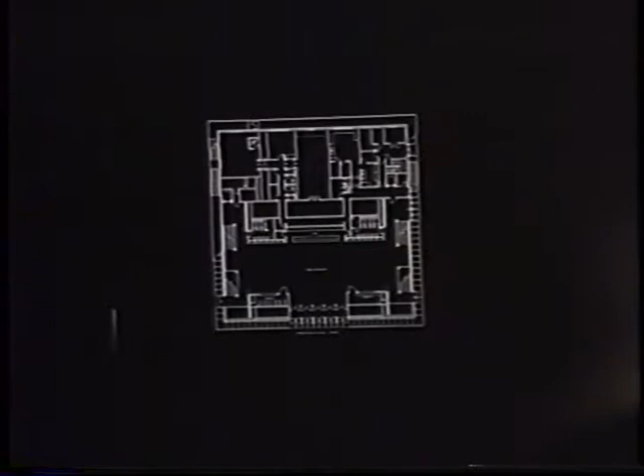The two stairs make you access the auditorium here. The stage of the auditorium is in connection with the parking. And the entrance of the building is also in connection with the parking, because the parking was not horizontal. So you have two connections, the parking, and when you open the door here, the magic box allows outside spectacle.

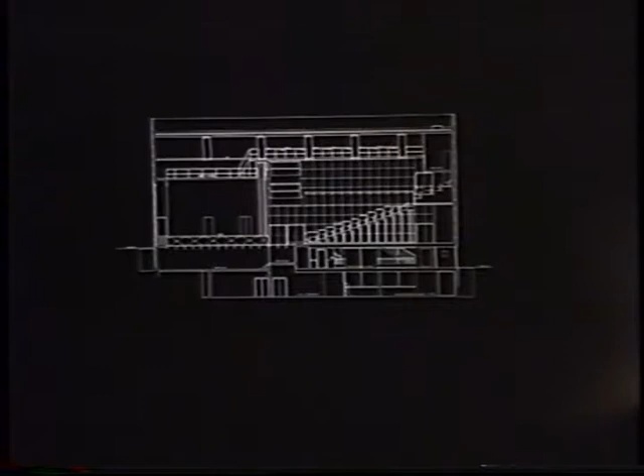Please make it clear. Focus. Okay.

Focus again. We are inside the auditorium. You should put some batteries in, it doesn't work anymore. Maybe the other one? Actually, no?

Here it's underground. To make the cultural center as literal as possible, we did one underground floor, which receives light from the peripheric.

Focus. So the light, please. Could you make the focus, please? It's okay.

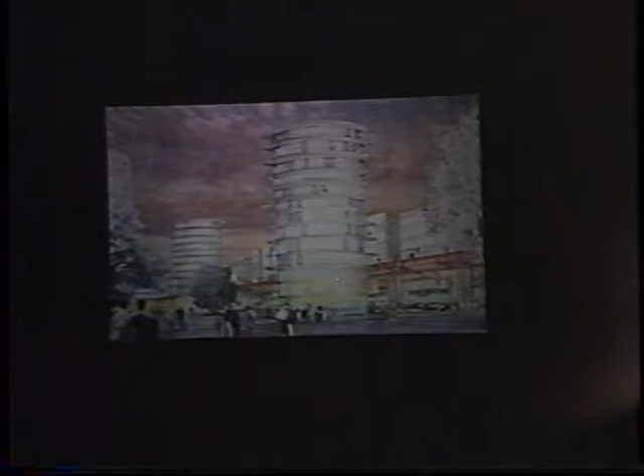All the building is located along the pontons, and we create, in fact, 2 levels: a pedestrian level, and another level on the ground, on the real ground, with cars and...

c'est toi qui as appuyé? Oui.

And the pontons, in fact, was the prolongation of the district network of the existing district network of the rest of the city in the south of it.

Different views of the site, and at the end of the pontons, on and above the water, we think it was possible to create different places to walk or to drink, or with shops and so on, to see the river, to see the city, to have, in fact, a relation with the city.

And with this ponton also, it was possible to have an in-depth reading of the project. It was not just like a front on the river.

They didn't like at all our project. We have lost. Yeah, we have lost, but superbly. Superbement, comme on dit. Superbly. They didn't like at all. They were waiting for a classical city, you know, like in the center of Paris.

Our land, if you can say land, because it's in fact a dalle, comment on dit dalle? Slab. A slab, yes. Was a very strange place here behind those ones. It was not in a front position on the pedestrian axis. So putting it up authorized us also to have a view on that pedestrian axis, which was, we thought, important.

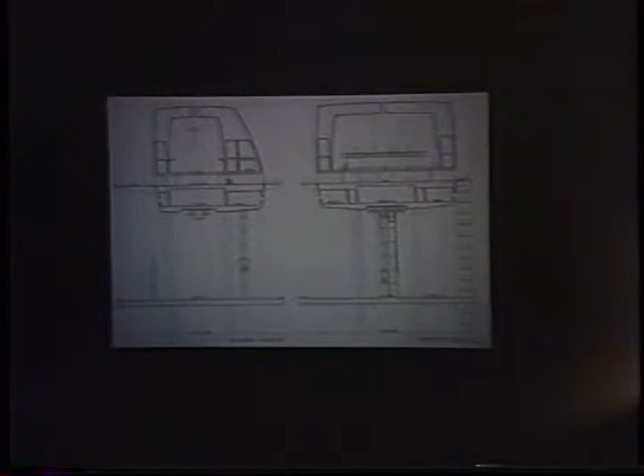Here we are up. Here is where the entrance is. Here is the parvis. And this parvis authorized us to have a different point of view of La Défense in every direction.

So that once more we have not a back and a front. We embraced all the landscape.

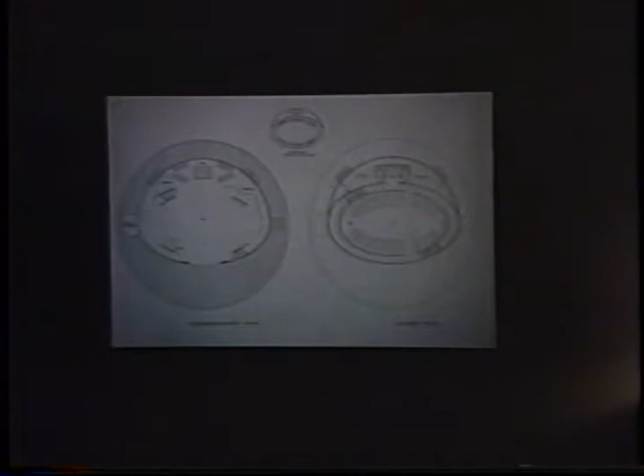We tried so the form of the church couldn't be too easily assimilated to a Christian church, because it is a Christian church, but they wanted to be able to accueillir, to invite everyone. So we wanted the form of our church to leave free interpretation to anyone and not be too easily recognizable.

And what we did, which I forgot to say maybe, is that we changed the normal way of doing a church in France. Normally in France you have a landscape, you have the church, you have the cross, the cross on the top of the building.

In our case, we put the cross down, on the ground floor, in a disc of water. You see it there. Here you have the bell, and the bell you can see it in the water.

When you are in the towers, the reflection was calculated very precisely - when you are at the 30th floor of the Fiat Tower, you can inverse the model. Normally it's like that, and the church - we did it with the towers, the church like, and the signs here, and we see that from the towers.

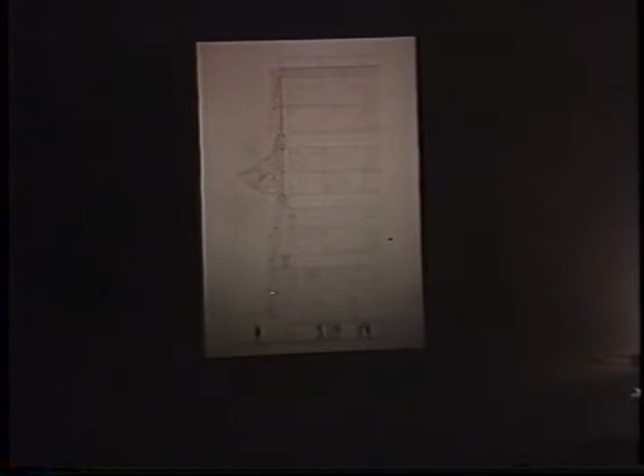We would build this building very quickly out of posts and girders of metal, very approximately, and then we would just dress it. There was a big—well, anyway. So this is complicated: we took the wind up, it went into a wind shaft in this thing here. Here you have springs, and another spring, so the dynamic of the wind would make the building move. Here you see the vanes, and here are little pockets, so the wind came from the outside into the pockets like a sail. This moved with a very slight wind, and even with an incoming wind, the thing would keep popping out—it was very strange.

The best thing about it is that the big problem of this kind of building, a universal exhibition building, is that nobody ever knows what to do with it afterward. This building destroyed itself.

It was like a parachute. If you keep a parachute on the sun, it will burn itself. So this building died, it burned itself, and the skeleton was left. So we can reuse a skeleton, or bury it if you want. So that is a story about this building.

Maybe there's another one. Oh, yes. At the upper level, there were these things that would open and follow the course of the sun. And everything is fabric, because everything will be built very quickly, very cheaply, and they would do that.

Now, you stop me if you're tired.

Why do I tell you this story? Because it's to fill a void, to fill a silence. I need to talk and to argue. I think modernity, our time, creates this void, and we are in a big void. The void is 95% of the buildings that are made now that is not architecture. They are culturally inexistent, this creates a big void. Most of the buildings that are culturally void are also technically inexistent.

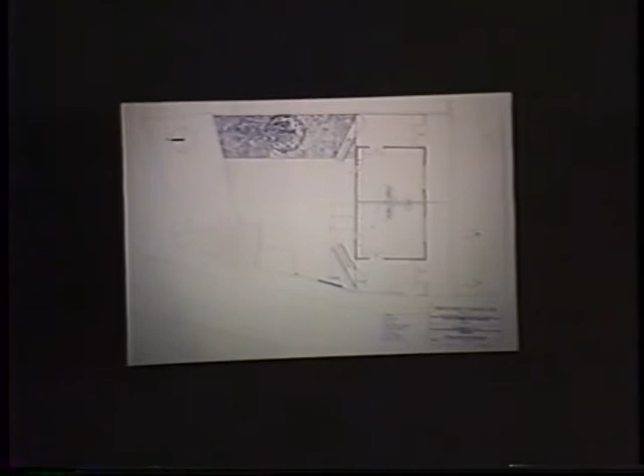This is a facade, made of corrugated metal, and at one point PVC -- you know what PVC is? Plastic, transparent. It becomes transparent and it's cut like this. This is getting built. That's another facade.

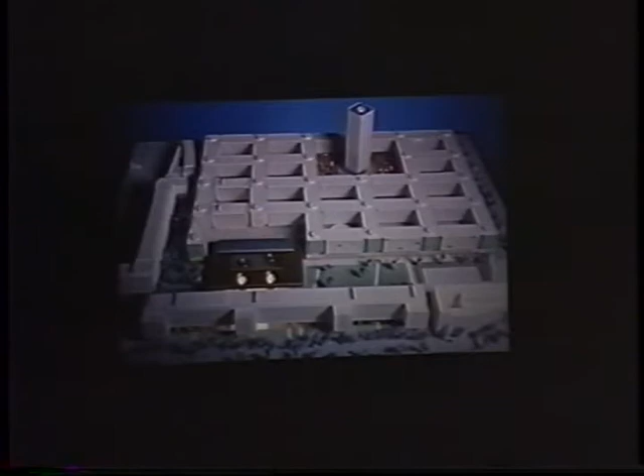Okay, something else? No? I don't know, maybe I go fast. This is Jussieu -- we'll have buildings after that.

Jussieu is a project that Édouard Albert built. It was a library, in a huge university where I think 40,000 students are supposed to study. In fact, it's a terrific place. It was raised, 5 meters higher than the street level of Paris. There are pilotis, and there's this grid on pilotis. The only big structure is for the administration. So conceptually, it's a nightmare.

But there's an idea that is quite interesting in it. For us, it's always a story -- the question of the ideal city, the cité idéale. An ideal city is always suspended, for intellectuals and scientists, raised above the level of the street, an abstract grid. Its abstraction is for the mind. So to me it's a failure, but for many reasons.

But the idea, and our addition to this, is to restore the idea of the ideal city. So the libraries -- there were two libraries, one for science and one for philosophy and literature -- are both on one another. And you'll see there's a sense of a floating thing, something hanging.

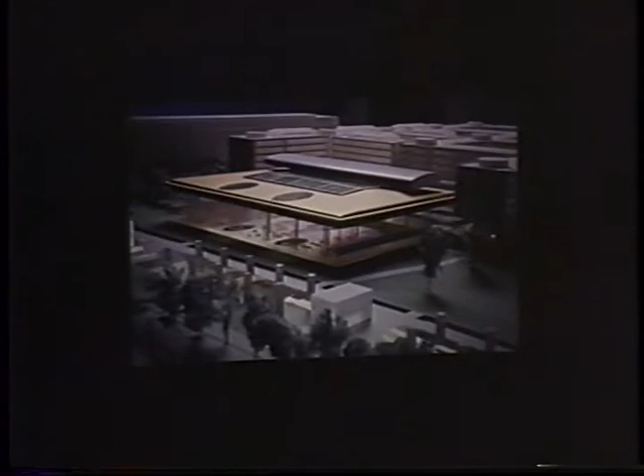So this is a library. Here, you come from above. There are 8 meters, I think, between this point and this point. You come into the library from above, so you see the library from above — all the people reading, all the books. A sense of accumulation that is very interesting.

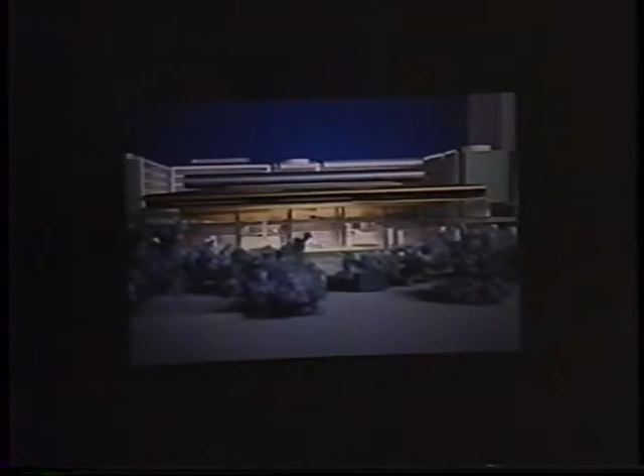The rest you see from below, this other library, like a big cloud with a space going like this. You'll see. Here, you enter this, you see the library. These are the reading rooms with glass walls, iridescent.

Can you understand this? This is the first library. You enter here. You see everything at your feet, like God looking at the Cité Idéale, an angel, I would say — or somebody on earth looking at a floating city.

This is the ground floor, this is the upper floor. This part is in the ceiling. It's a big room.

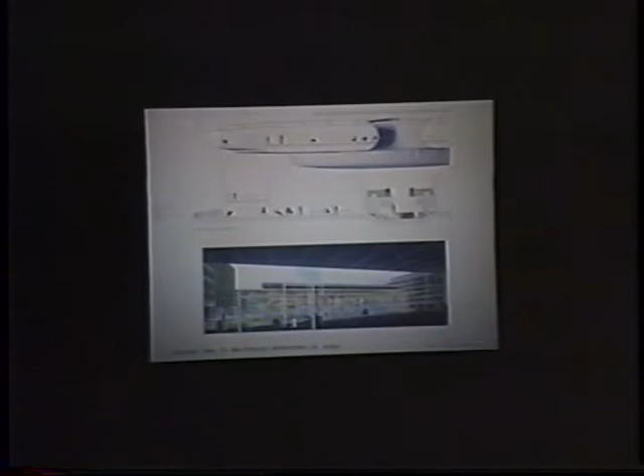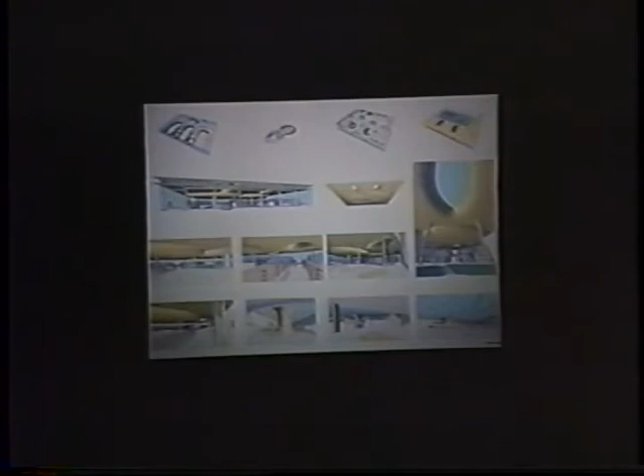Here is a section. You see people, this big trumpet — it's like a trumpet. They are flat libraries. Here are views from the inside: ground floor, this little ceiling sticking to the ceiling, the upper floor, and the roof. And this thing here connects, like a trumpet, you know. So the ceiling is not a ceiling.

Well, yes, in fact this geometry, the complexity of this geometry is to redeem the grid. The grid is fatality. This complexity of space is something that will save the complexity. Is this clear? It has to do with forgiveness, etc.

This is another building. I like this building very much. It's the first competition that we won. This is a library — this is an existing building, of course, this ugly building, and they asked us to build a library in this building, which is very badly built. So you have to be very optimistic, overly optimistic. The only quality of this building was its inner space — it was just a big space.

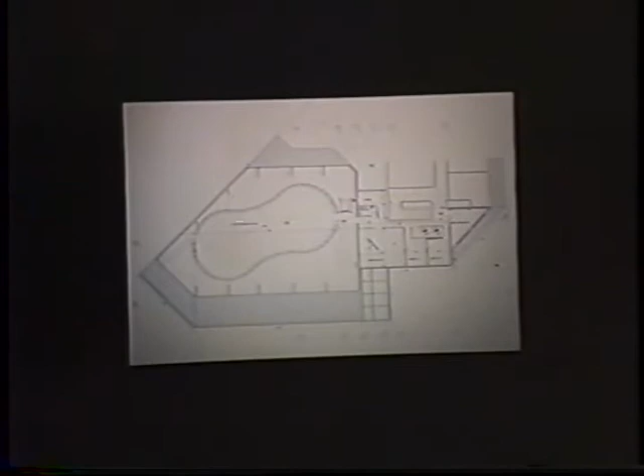So in the big space, we put a big object — this is a big space to me, and if I want to fill it up, I'll put a plane, a big plane that will go from here to here. And we filled it with this thing, which is like, how would I say, a bidet, you know.

Here it comes. See? There's like an animal, it's like a shell, a huge animal that's got to jump like this. It's an oversized object — it's not a piano, it's in plastic really, like a wash basin. It's pop, it's oversized, and it's grainy surface, like an oversized thing. Here, this is the thing.

So it's a reading room upstairs, of course. Okay? This is the existing space. This is green plastic, and this is light. This is pop.

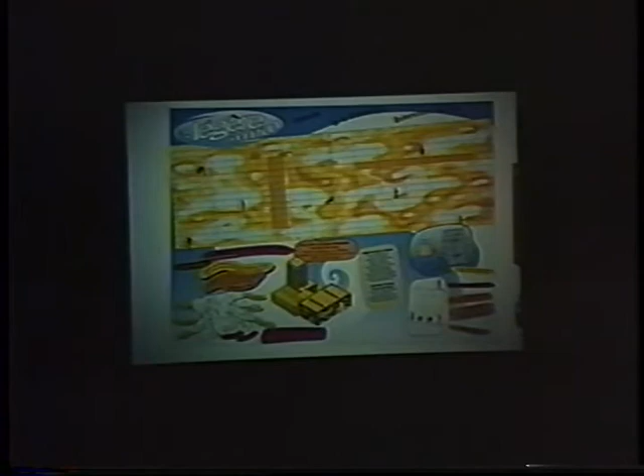This is a library, a very complex story — it's an addition to a library. I'll show you this, because all the drawings are in black and white. In every French competition we don't have the right to put colors. It's to help neo-Corbusian architects, of course — it's easy, neo-Corbusian architecture is very easy to express in black and white. This architecture, when it's yellow, is very difficult.

So it was an addition to this building. This building is very interesting — it's in a campus in Dijon, built by the same architect. And the same architect began by making Beaux Arts buildings, where the view is in the axis, symmetry, etc., and then he began to make more complex buildings like this one, which are a little bit cubist — one functionalist and cubist: one function, one shape, one material. So our addition is one function, one shape, one material.

The problem is, this is stone. We are in Dijon — the stone of Dijon in Bourgogne is yellow, and there's a moutarde de Dijon, which is yellow too, you know, Dijon mustard. So the project is yellow. But the thing is, this box is one object, and there has to be an ambiguity in the material. It's yellow like the stone — it's like marble, like this. Marble, the material.

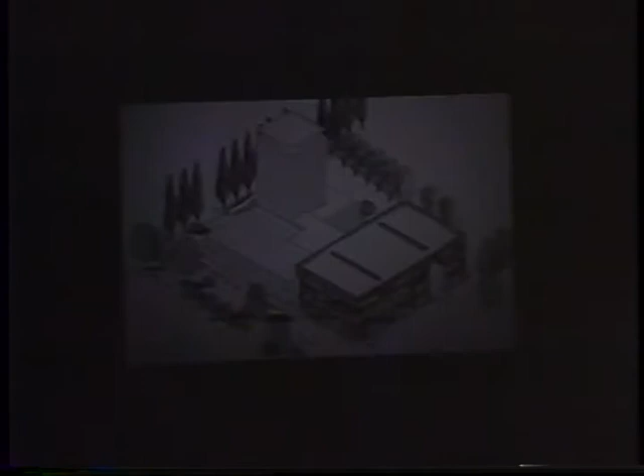And this was the first project. We studied a lot of libraries, and I'm going to show you buildings of libraries now. Being in a library is something very interesting, and the most interesting thing about a library is being lost - lost in the pleasure you have, by the number of documents available and the number of people studying. It's very positive, and it's important to feel that you are here, that you can feel the space.

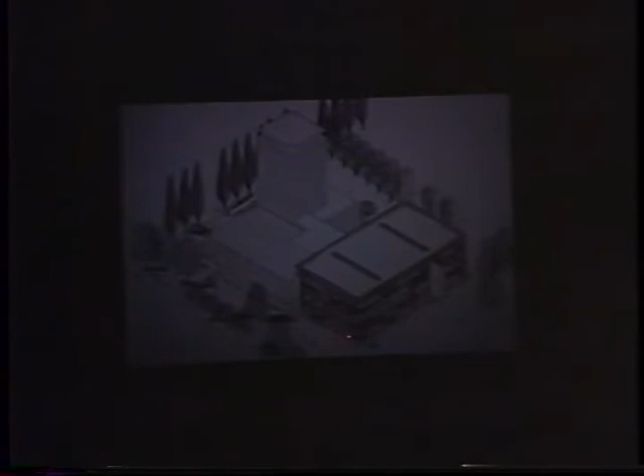So in this building, first floor, second floor, and ground floor, there were these big slots with big glass walls like this. You can see the floors do not connect to the facade, so you have the sense of floating. You see the building like this, but you see it vertically too.

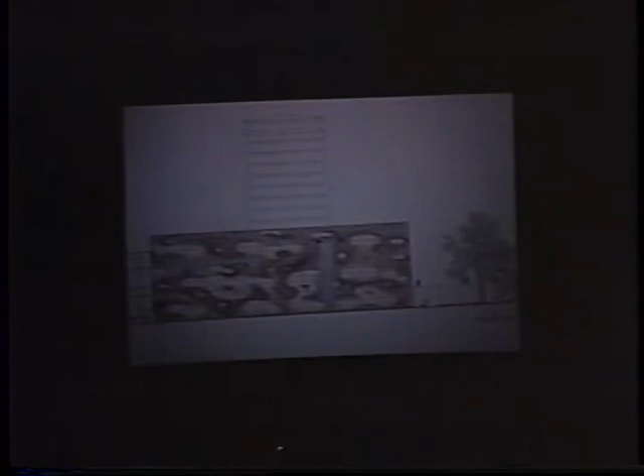It's supposed to be flat - this is the facade. See, these are the floors, this is the structure. When you are somewhere, there's this big thing happening, and you feel that it's happening on a larger scale than you. I like this facade very much, in fact.

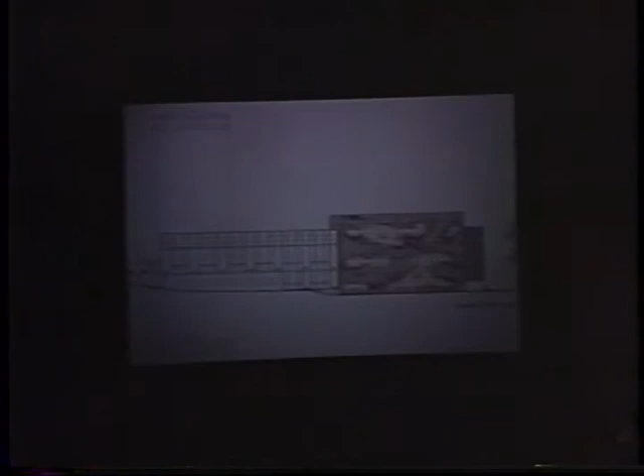This is glass, sorry to tell you that. Here, the floor - glass floor - connects to the facade, and these are the facade. So you see you are part of a bigger thing. We will work on this concept.

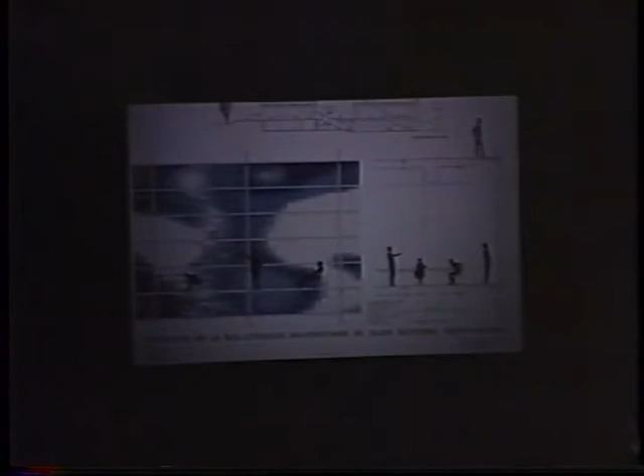It was politically very important - the newly elected mayor chose this. The old library was close to the cathedral, and culture was linked to history. It was very important that the mayor said: this is a new part outside the boulevard to put the new center of town. We'll put the new media center - we call it the Médiathèque. It was very important.

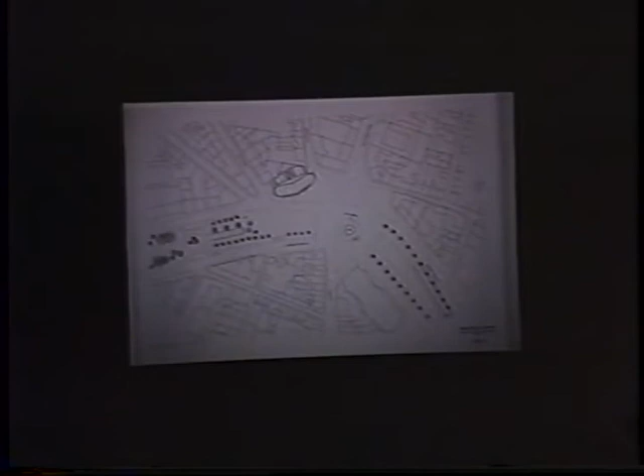It's very strange - you see the boulevard, there is a perspective like this, and there is a continuation of the boulevard. It's broken like this, you'll see why - because it's the end of the perspective first, and then it is a continuation of the boulevard too.

I'll go back, I'll show you something. So what we did is this thing - this is what we call chaos. I don't know if it's chaotic, but it's not very nice. We have a big church that is quite ugly, we have a building here that is quite common, and we wanted to achieve a number of goals.

First, to be monumental, to assume the perspective - a cultural building, a big political standpoint, we have to tackle the monument issue. So to be monumental is very easy - we made a background like this, and we put some big events like this. This is not nice, should be put down.

The thing is, this building becomes the focal point of a big mess. It has to deal with the complexity and the richness of this church, however ugly. But people like it because they can see very deeply into the building - it's not a facade, a glass facade, there's something happening, there is deepness in the facade. So our facade is a little bit delicate, like lace - a little bit overly delicate, of course.

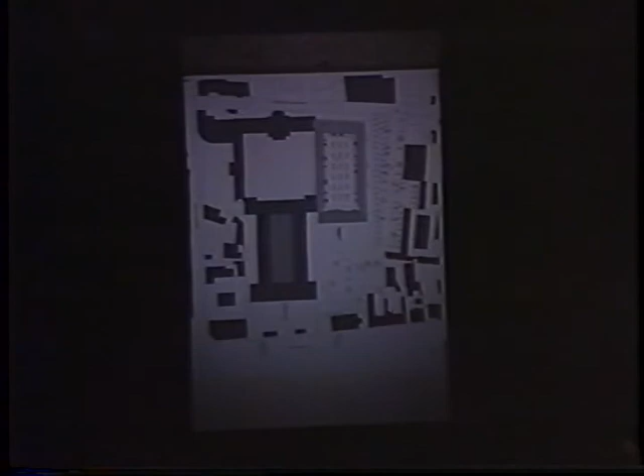Strange, very strange. So we decided not to make a facade on this building, to let the view go from here to here—100 meters, 330 feet. So the view, everything is made to be monumental from here, so we can erase this. There's no facade, so as not to give importance to this space. If you could make it in focus, because it's a complex thing.

Oh, good, thank you. Here's a building. So it looks like things have been falling apart. Everything is hazy, the geometry is always changing. There's one floor, ground floor, and one floor for lecture. On the ground floor you have a huge room, 60 meters long, with books, old books. That's what they wanted - in a usual library they don't show books, they're on shelves that high. Here they wanted to show an old room bookshelf, so it's quite monumental, with the size of a church or a historical building.

So now, in the plan, everything has to be organized following this very important historical thing. And to counterbalance this, we have a series of stripes, one being a work of art made by Lawrence Weiner, an American artist, that will be text. So to make this something with no form - we don't want form, we don't want shapes - we use a geometry that is always changing, we use text, and we use transparency.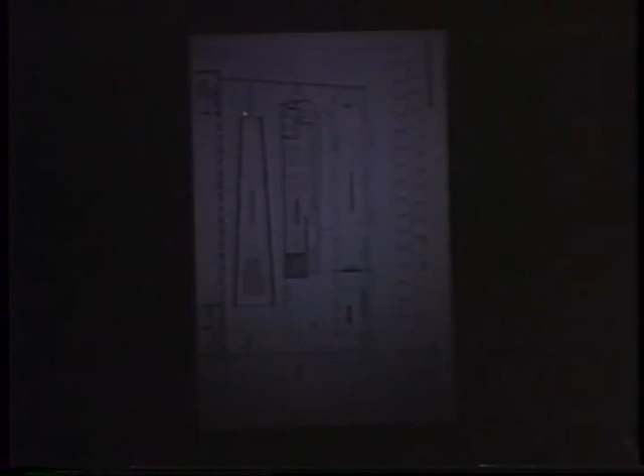On the reading room floor, this is the ground floor, the big room with the books, storage, one part of the storage, a staircase that goes to a big corridor where the Lawrence Weiner text begins. Kids - this form helps to see the depth, you know, chuk, chuk, chuk.

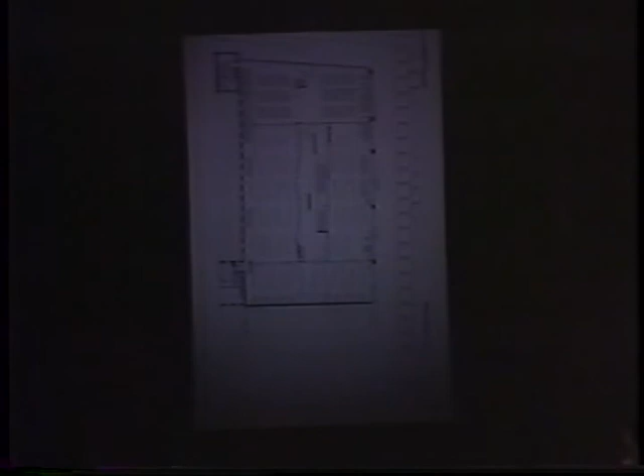And this is the upper floor. This is a facade that goes like this in every direction, you'll see. This is a section - the big room that I told you, the reading rooms, and the ceiling.

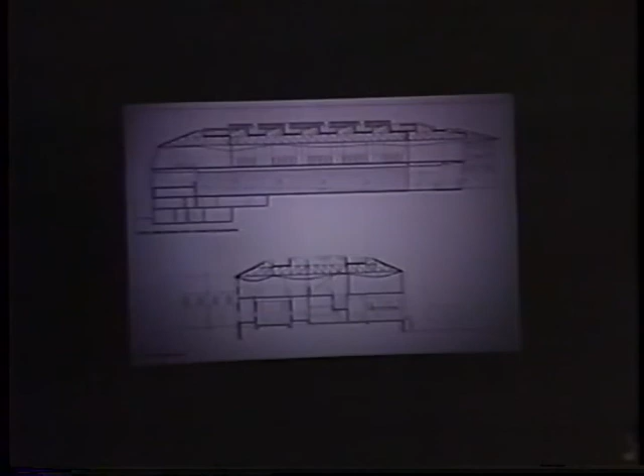Oh, here is a big reading room, a ramp that goes like this for the exhibition part, the storage, the stair, and this facade that is like this.

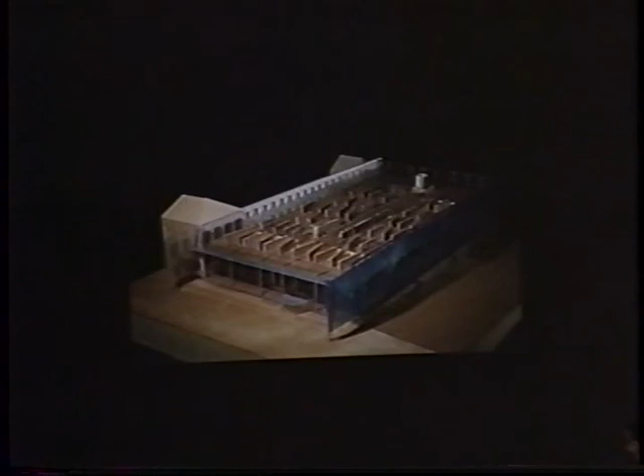See, this is a model, office model. Now I'll show you. Here, the existing building, the screen - what we call screen facade, which is blue - the letters, the rear part, which is like this, with orange strings, aluminum, that will make it flow.

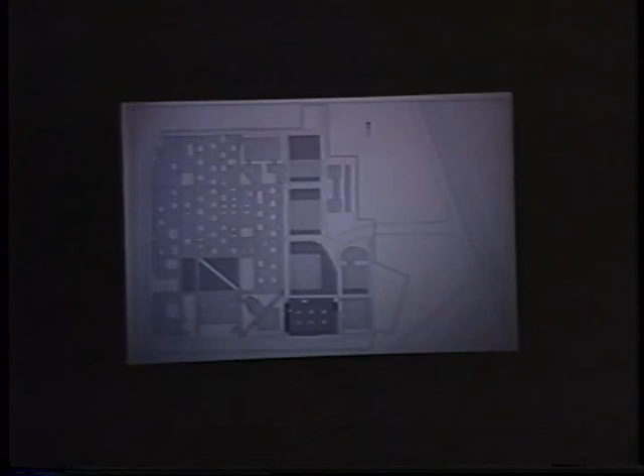See, this is a campus, this is a library - they asked us to be the library, so it's the same plan. No shape, we always take the whole site. No shape, just patios. I told you the importance of a library is accumulation to me - accumulation of data and accumulation of people. Can you make the focus, please?

It's supposed to be on focus, but 3 floors, each floor divided by a 12 by 12 meter room, each has these little dots. So the perception of the library - the more you go in, the more there is to see. Here you see 3 floors, you see the big room, you see the dots. This is the entrance.